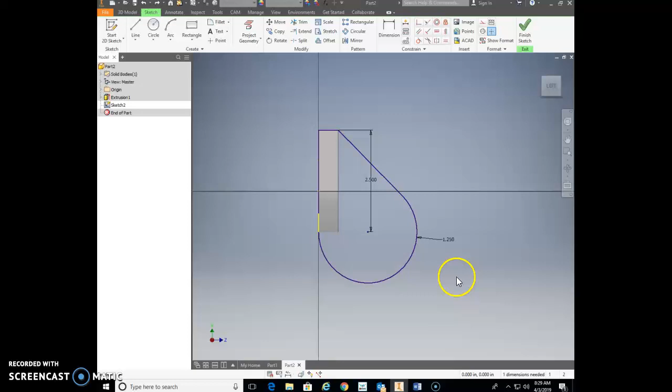I was noticing that for some reason this blue line stops right there, and I just have that yellow projected line. So you actually need to grab the corner of that line and drag it down. There's my green dot, let go of it, and now it connects and it's all blue. For whatever reason, that did not get connected before, so if you notice something like that on yours, you definitely need to connect those together.

It's much better to drag that line down, click and hold, and drag it, than to make a new line there, because you don't want it to have multiple lines. So there, that looks great.

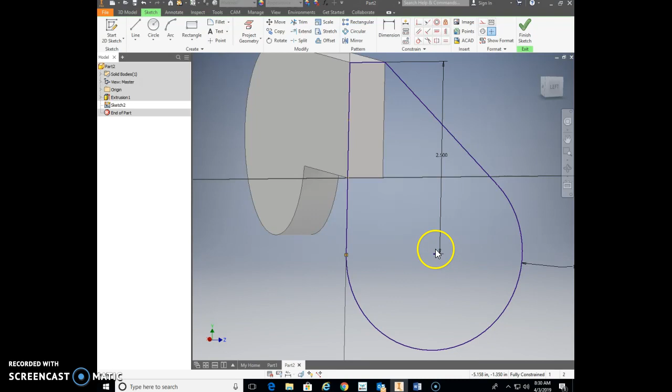We're going to go ahead and finish that sketch. We're going to extrude, and on this one I'm going to extrude a little bit more, about 0.75, and see what that looks like. Let's hit F6. I really think that looks pretty good. I really think this other part maybe needs to go 0.75 too. We can edit this back and forth. I really think that doesn't look too bad. Might be a little bit thick there, but I think it's going to be okay.

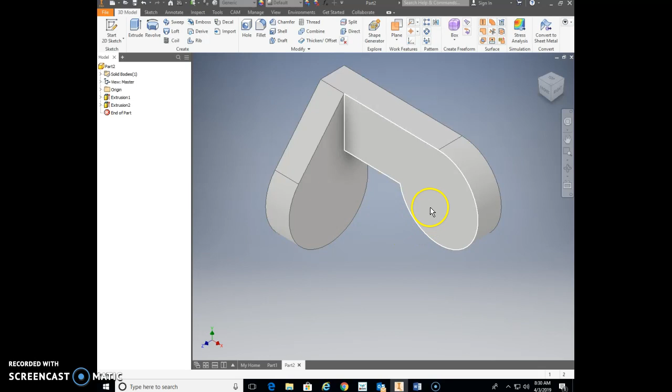Alright, so with that we're going to go ahead and put on our holes. We're going to use the hole command, just like before, and pick a surface here. I'm going to put it way over here out of the way so you can see how it changes when I pick the concentric option. So I'm going to pick there. That hole's there, but now all I have to do is come in here and click on that circle. I highlight it, and notice how it centers that up perfectly, concentric to this other one.

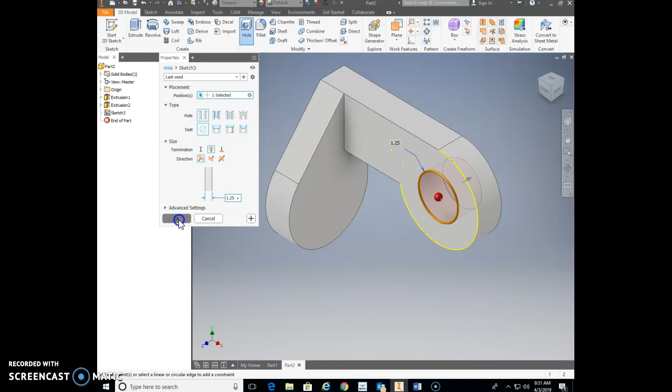Looks beautiful. The size of that maybe is a little bit small. Maybe I'll go 1.25, not 0.125, sorry, 1.25, and see what that looks like. I really think that looks pretty good.

I'm going to do my hole command again. I'm going to put my hole there, and this hole to me looks a little bit larger, so I'm going to go 1.5 for the hole. Then again I'm going to use that concentric portion and click on that arc there. Centers up there nicely. Again, it's remembering what I used last time, which was through all, so it's going through all, just a simple hole, no counterbores or countersinks or anything, and I'm just going to go OK. So there's my holes looking great, and this drawing really looks pretty good.

The only thing I have left, and notice I did not put these on the sketch, are the fillets. Much, much better to put your fillets on afterward when the thing's a 3D solid.

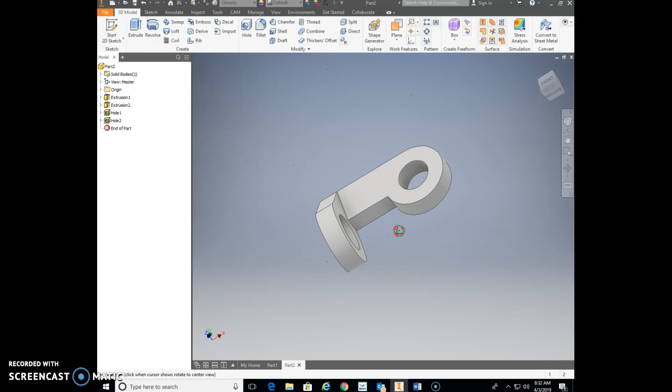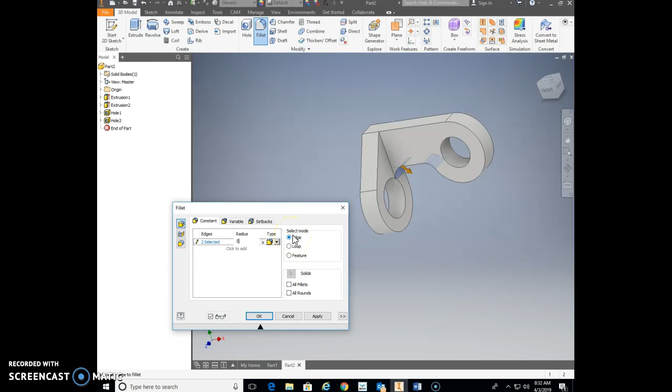So I'm going to flip this up to where I can see these bottom edges a little bit, then go into my fillet command, and pick that line there and that one there, those two corners that I'm filleting. 0.125 is not enough, so I'm going to increase that up to maybe 0.5. Let's see what that looks like. I'm going to go OK, hit my F6.

0.5 is not bad, I actually think it's about appropriate, but I maybe need to edit this other part of the drawing just a little bit. I think that looks good, but it gets kind of into this hole a little bit, so I need to stretch this hole down a little bit further. For that I need to fix my measurements, so I'm going to go back here. That part was extrusion 2. I'm going to open it up and edit the sketch on extrusion 2.

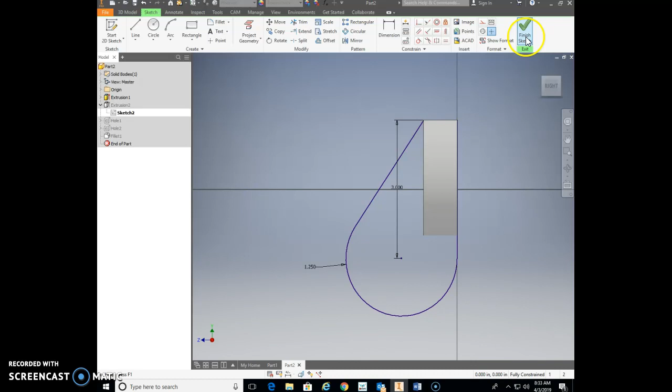And so instead of 2.5 down there, well, maybe I go 3, and see what that looks like. Finish my sketch, come into there. That doesn't look too bad. It really, to me, almost looks like it's sticking out a little bit further, so maybe that circle needs to be a little bit larger.

So let me go back to that sketch. I'm going to change that to 1.5, and finish my sketch there. You know, I really think that's looking pretty good. Again, it's not exactly like the book, but I really think that's looking pretty good. Our fillets look nice. I think that drawing's all finished.

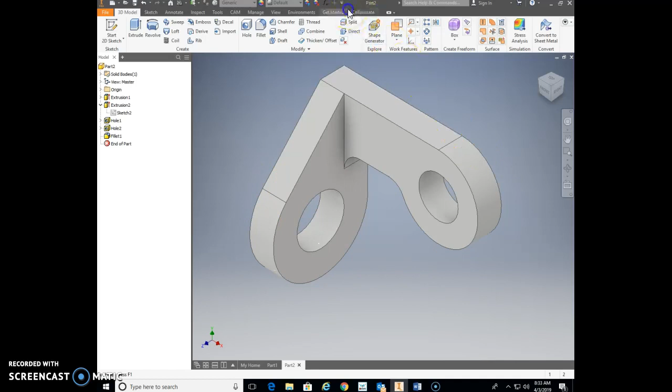You can go ahead and change that material to something. Oh yeah, gold. Loving it.